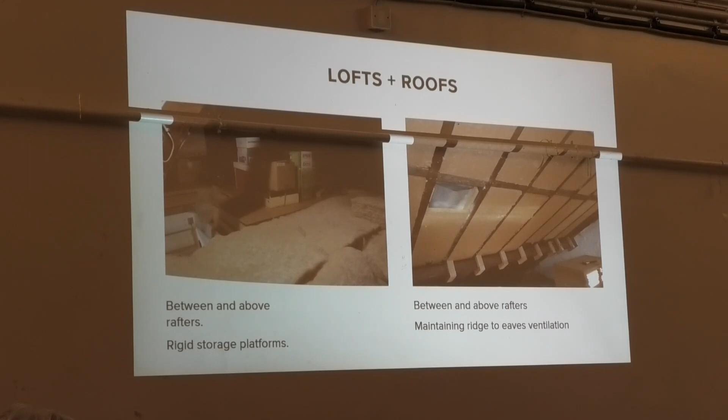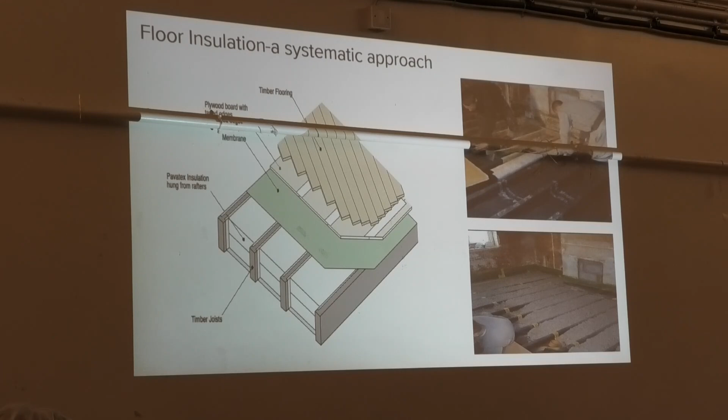Now, if you move to the pictures on the right-hand side, you can see an air tightness membrane is going in as a carrier membrane in this case, and it's carrying a Warmcel, which is a recycled newspaper insulant, and then there's an air tightness tape, that green tape that you see all the way around the periphery of the room, which keeps the drafts out as well as keeping the heat in.

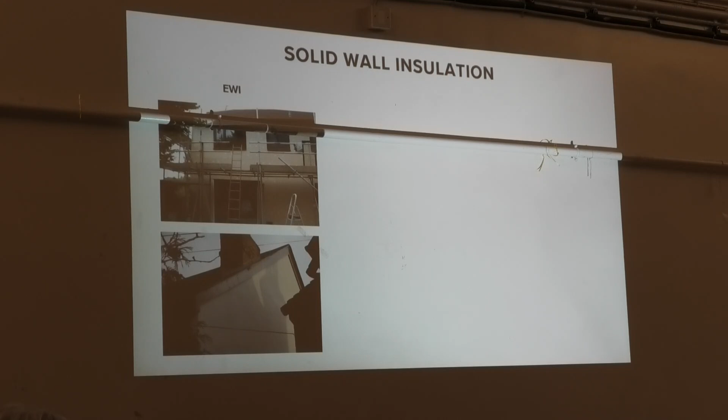That essentially means that if you've got internal wall insulation, the build-up of around about 30 litres of water, which accumulates in the average home per day, so through our normal living experiences in a home, around about 30 litres of water per day is released into the air in our homes. So that has to go somewhere, generally out of the building.

So what you try to do with a vapor open or vapor permeable construction is allow that moisture to find its way out of the building, rather than trying to keep it inside and then mechanically ventilating it, although mechanical ventilation is often necessary in any case. Now, vapor closed as a methodology has long been used. It is now increasingly realized to be the wrong way of doing things, and it's a very high risk path if you do use it.

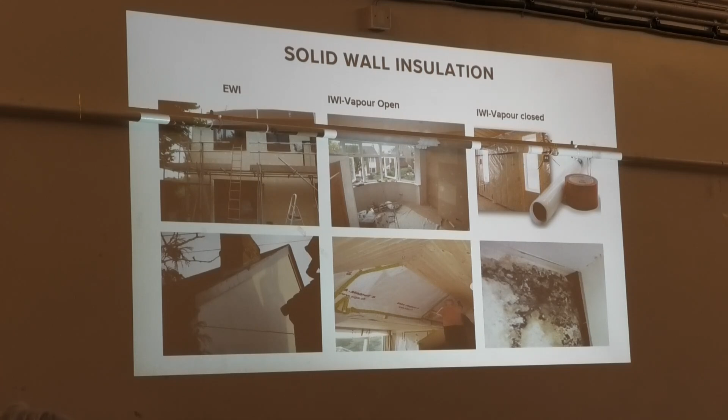But very briefly, that's what can happen, and that's when you're lucky, because there you see it. Very often you don't see it. It's behind the insulation, and that's when the real fun starts. So what can we do about that? Okay, well, air tightness is very closely related to ventilation and the means by which moisture normally gets out of your building.

So in a typical building around here, there'll be lots of nooks and crannies and cracks and openings everywhere that will let the cold air in, let the heat out, and also let the moisture out, which means generally you don't have too much of a risk. But as soon as we start to insulate and or make our buildings more airtight, we change that moisture balance, and that is where a risk can occur. So the way we deal with that is by putting in place a ventilation system.

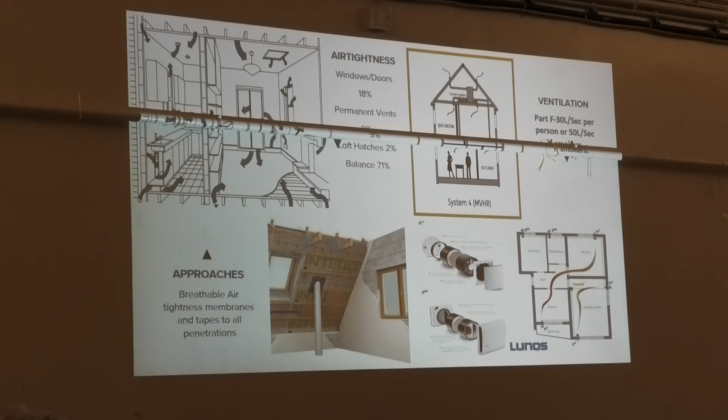So building regulations, which would be one of the things you need to consider, will dictate that under Part F you've got to have a ventilation system that creates 30 litres of fresh air per second per person in a normal home, and in a home where there are smokers, it needs to be 50 litres per second per person. So, moving on very quickly.

Residual heat demand, this is going to be super brief. I know you guys are probably all experts by now on air source heat pumps. You've had the talk. I just want to point out two things. Very often this gets glossed over. So the coefficient of performance, which basically is the ratio between the energy going into a unit and the energy coming out of it, is about 0.9 with gas. So that means you put in 1 kilowatt hour of gas and you get out about 0.9 of a kilowatt hour.

So there's a 10% loss roughly, if that's a modern, efficient condensing boiler. Best case about 93%. The coefficient of performance of, and there's a typo here, apologies, of the ASHP is 1 kilowatt hour in to about 2.8 or 3 out. So that sounds great. You put 1 kilowatt hour of electricity in, you get 3 out. It isn't quite that simple, but that sounds great.

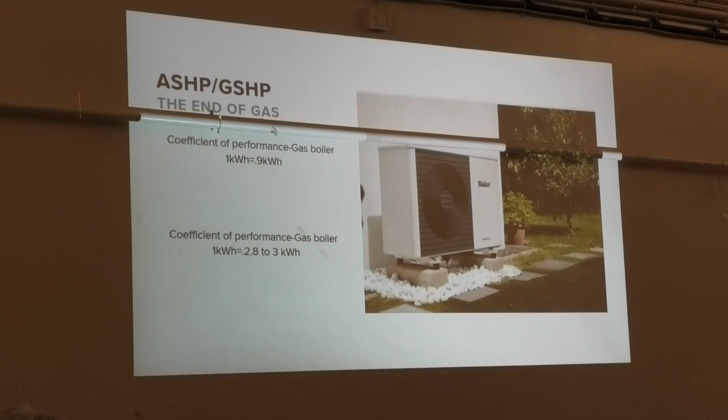The only trouble is that electrical energy is much more expensive than gas, so there's an issue there. But these are my top tips if you're considering an air source heat pump. Don't do it unless you've got a major program of retrofit undergone in your home and you found ways to reduce your energy demand. Otherwise, you're going to find your bills will go through the roof. May not be a concern, but for most people it is.

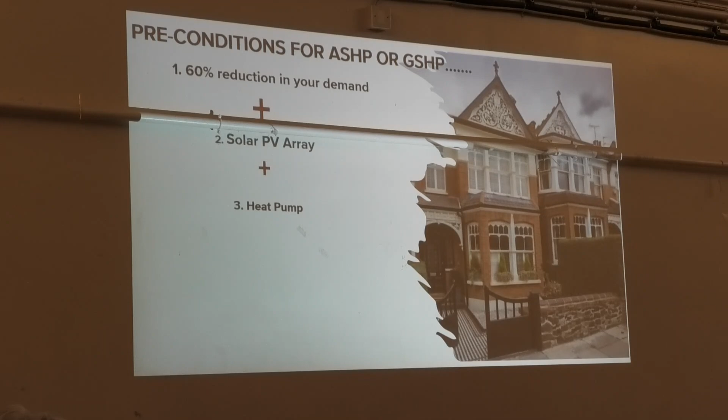Second thing you could do is have a solar PV array. That will help because it's using electricity and contributing some of the electrical load to run your air source heat pump. And just a final warning, it's nearly 4 times. So it's about 45 pence per kilowatt hour at the moment for electricity versus about 13p for gas.

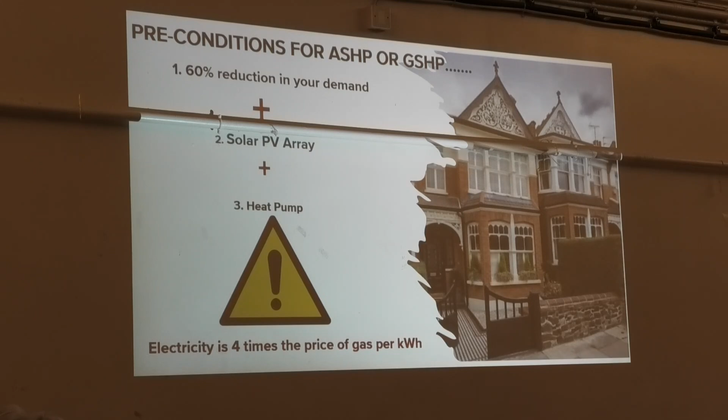Two last elephants in the room. The more we do around our building fabric, the more important the unregulated energy is. And when we speak of unregulated energy, we're talking about all that stuff that isn't heating, hot water and cooling. It's the cooking, the plug load and so forth. That remains an increasingly large percentage of the energy the more you do with the heating load.

So it's an obvious one, but people forget about it. And when we're trying to get to net zero, we have to target that. And at the moment, the government doesn't do that through building regulations and EPCs.

And perhaps the last thing just to say is that when you look at all of the things you need to do, and even when you employ professionals to help you, there's still a huge performance gap. So we have a lot to learn as an industry, the construction industry in particular. Typically, you design to maybe, in this case, 20 kilowatt hours per square meter per year, and it can be up to 70 kilowatt hours. So there's a factor of 3 or 4 gap between what we're trying to do and what's actually happening.

Very, very briefly, on to some case studies. The reason I've chosen these 3, these are case studies that XCO2 have worked on, projects of ours. And the only reason I've got them here is to simply say there is no reason, even with an Article 4, even with a Grade 2, because 2 of these are Grade 2 listed. The right-hand one, Belsize Fire Station, is Grade 2 star listed.

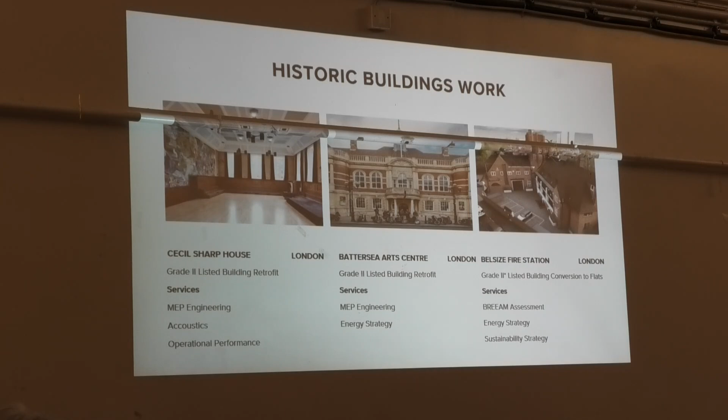You can still do amazing things to reduce energy consumption. You can get it down by 50, 60, or even 70%. So there's no real excuse to not do it. It can be done, and I would encourage those who can think about this from a strategic point of view to do so. Two final slides.

This is an example of a study we've just done for the Peabody Trust, where it is heritage buildings in Pimlico. They're mostly 1860s, 1870s, 1880s, and some of them are Grade 2 listed, some are simple heritage, and some are Article 4. It's a mixed bag, about 6,000 units across their estates that are made up of these types. And there are all sorts of solutions, which are sometimes fabric-based, and sometimes fabric plus energy systems-based.

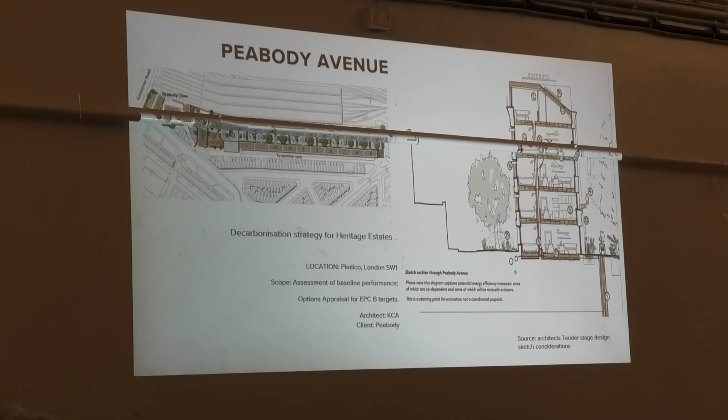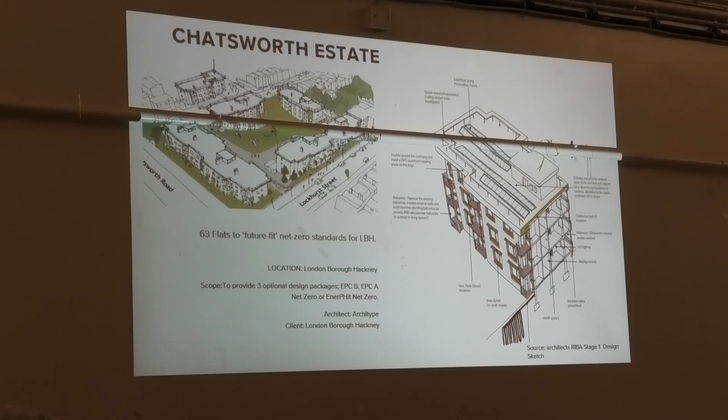So when you look at a net zero ambition, some of the opportunities there are around decarbonising the energy system that tenants or home users can access. This is another example of a similar one we're doing for the London Borough of Hackney at the moment, not listed, but a similar systems approach, where you're looking at it strategically from the point of view of the energy system as well as the building fabric.

The key things just to remember is that every pre-1990 home will need to be substantially retrofitted. That's yours, mine, and Buckingham Palace as well, I guess. Net zero can't simply be achieved by buying green energy, so plugging into Ecotricity does not do it. And I can speak to you about why it doesn't, but anyway.

Everyone has a role to play. The solution to this is not government, the solution to this is not you or me, it's everybody working together. It's not the trust, and yes, it is the trust. It's everybody working together to find solutions strategically.

And please remember, you need a fabric-first, whole house approach. And last but not least, there should be no insulation without ventilation. Now, there's lots of different approaches. They don't need to be whole house approaches when it comes to ventilation systems, but you do need to ventilate.

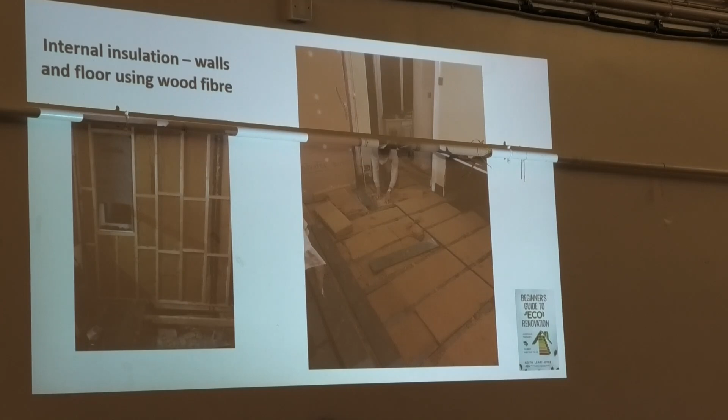So once we'd done that, we then had to think about how would we ventilate. So we'd got the breathable walls, so we knew that the vapour was going to be managed through all the breathable materials that we used. But we had to find ventilation. In an old house, we couldn't have an MVHR like you would have in a passive house, because you need... Thank you very much. Shows how used I've got to it, isn't it? Mechanical ventilation heat recovery system. So you can have a whole house system, but it's got big tubes that have to go between the floors. There's often the space in the loft, but between upstairs and downstairs. And then it takes heat recovery ventilation into every room in the house.

But we couldn't do that, and we discovered we've got two different sorts in the house that are single room heat recovery units. So that means that as the stale warm air goes out, the cold fresh air comes in, and as it goes through the tube in the wall, then the heat is exchanged over, and they claim that we save 85% of the heat. So we have these in most rooms. The good thing about these is that you can put them in later on if you haven't got enough. If you feel it's not right or your measurements aren't right, then you can put more in. They go in each room. They can connect up fully. So to me, they seemed like a really good option.

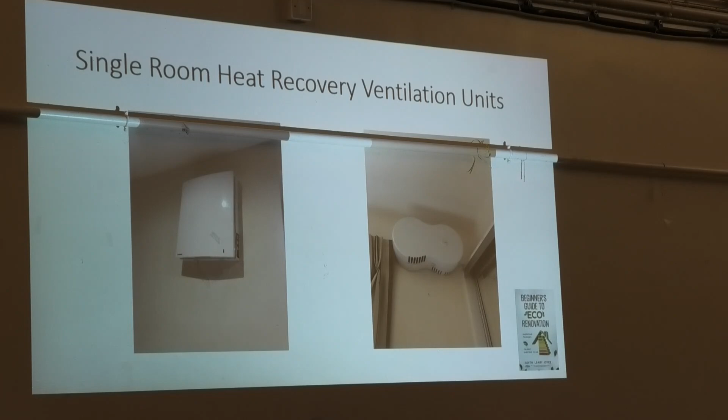Then there was the heat pump, which, I don't know if you have a Facebook renovations page around here. We've got one in St Albans. It is magic. Any question you have, somebody else has asked it and somebody's answered. It's fantastic. And there were long conversations about heat pumps and the noise. And were they too noisy, and would they disturb the neighbours? And would your house be warm enough?

So our provider was able to take us to another customer who had the heat pump that we were looking at, which was supposed to be the quietest one on the market. And it was very reassuring to see it, well, hear it in action. And we went for it. I have to say, you can see that the square bit is the extension. So we actually spend most of our lives living underneath the heat pump these days. And I don't notice it.

The times when you notice it are on really, really cold days when we had snow. Remember those bitter cold days? Then there's a gentle thrum that comes from the roof. It's no more disturbing than any central heating system, to my mind. So if you're getting worried about noise on your ASHP, from my experience, it's not a problem. And we certainly are warm enough.

I heard recently, went to visit some friends who live in a passive house, and they said that they've been told that one of the measures of someone who lives in a passive house is they never know what the weather's like outside. And I'm pleased to say we're nowhere near passive house. Of course, we couldn't be. But we never know what the weather's like outside.

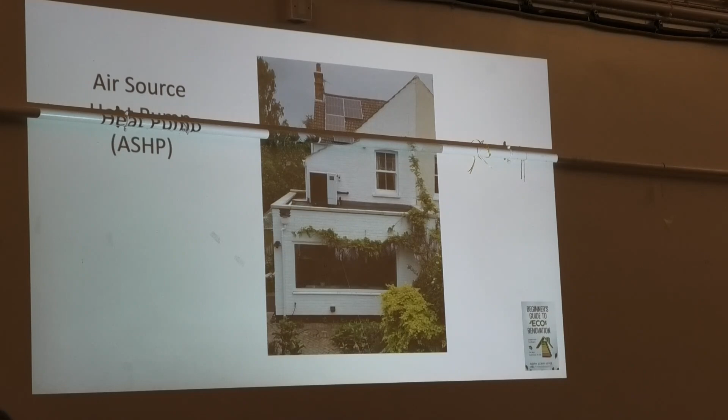This is the new kitchen, which is absolutely gorgeous. I love it, and we live in there. It's an absolute delight. As I said, we're saving 75% of our energy usage. We worked it out on kilowatt hours in the last year before we started any of the retrofit work. We used 25,500 kilowatt hours. And in the 2 years that we've had with the retrofitted house, first year we used 5,200. Last year we used 5,300.

EPC has gone from a D to a B, and we had the house valued just out of interest, and one guy came along and all he wanted to know was, where's your internet points? The second guy came along, and his dad was a builder. He understood what we'd done. He was very concerned about the environment. He added another 90,000 to the value of the house. And he said, we'd made clear we weren't going, but he said this would be a special sale, there would be a bidding war, and it would go above that.

So where my mind is now with retrofit is that if you've got your own house, you can do this. And it serves you from comfort, cost, and climate. There's really no good reason not to do it. I can highly recommend it. Thank you.